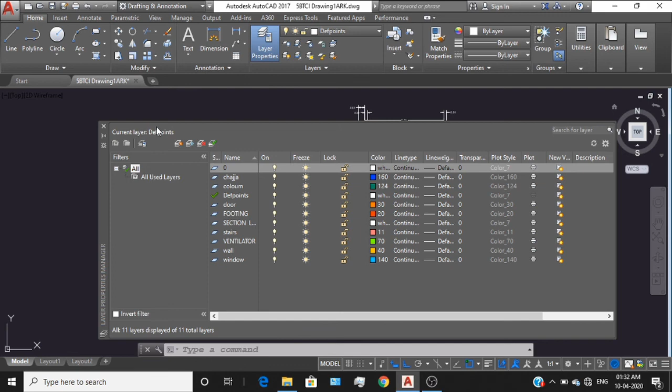So to place it under the layer property of wall, I have taught you already in the previous video. We need to go to the layer properties. We can create it through this point. This is new layer, Alt plus N. I have already created so many layers. So no need to create again, but you can try it and watch my video.

And then what I need to do is select the whole plan, go to the function and select the wall. Okay, so it comes under the wall layer. So if I switch off this wall layer, then the whole plan will go off. Okay, so this will help me in working with the wall.

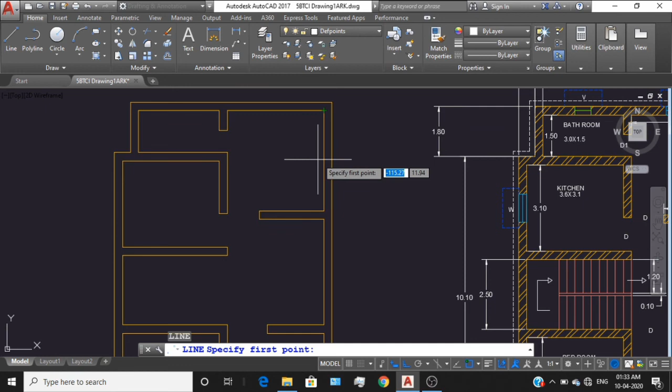Now it's time to make the windows. You can place the windows according to the designs of the plan. It depends on the columns, placing of the columns and designs according to different architectural designs. So it's a basic plan. So according to this plan, I'll place all the windows in the center of the walls of all the rooms. So my window dimension is approximately 1 by 1 meter. So it's a square window.

So starting with, it's my trick, like how I will make the window. And you can make your own tricks to draw anything faster. It may be your trick is faster than my trick, but just practice it. Okay, so I'll first make the line in the center. I'll show you again. Control Z, enter. I'll search for the center, the triangle. So here's the triangle midpoint. I'll draw one perpendicular straight line.

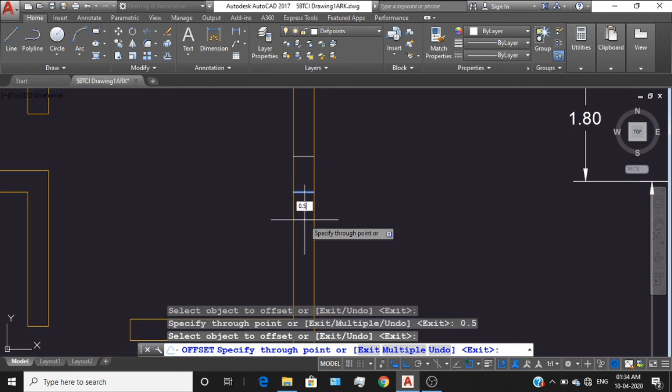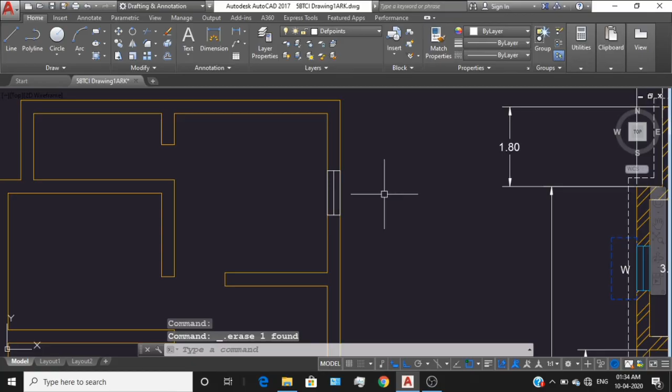Then I'll take offset, O, enter. I'll take offset 0.5 meter this side, from the center 0.5 meter this side. Then if you want one line also in the center, this represents the window. And then if you want a complete square window, then press REC, rectangle, from this point to this point and delete these two extra lines. So this is how we can make the window.

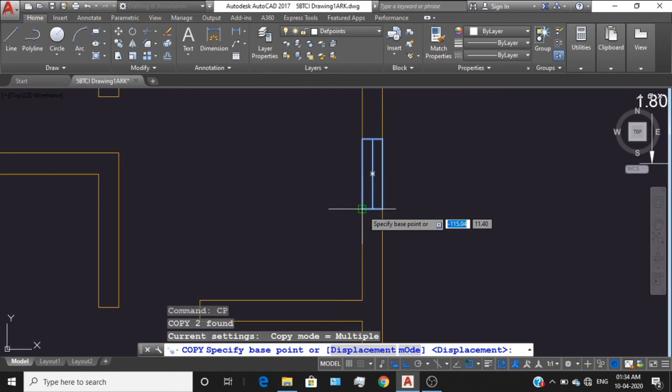Similarly, we can draw everywhere, but in a plain line, we can just copy paste it to save time. CP enter, or you can go for CO enter. So it's again one trick how to copy and paste. I will not select it from any point because I am going for the center of the plan. So I will select the center of this window. Then I'll check for the center of this room, this dining room. This is the midpoint. I'll click. Then I'll go for the center of this drawing room.

For this, you need to remember you don't need to join all the lines. If you join all the lines, you will not be able to find the center of each and every point. And also from the object snap settings, you have to ensure that midpoint is on. So similarly with the ortho off, you can copy paste it continuously. CP enter.

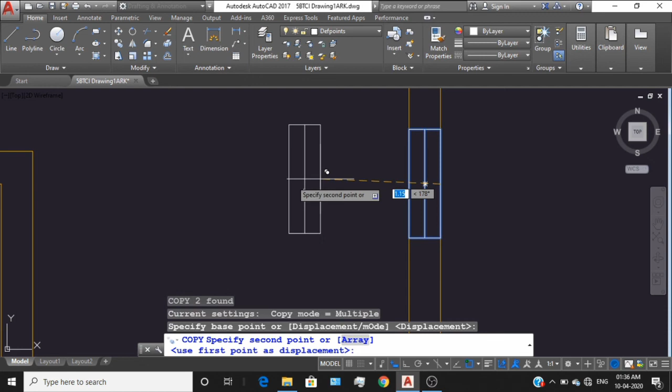Now I need to copy it for this side. So this side midpoint I'll find on the inner side. So what I need to do is copy from this end. Instead of left side, I'll select it from the right side. I'll paste it here. For staircase, we don't need a window. This is for kitchen. This is also your wish. You can make a bigger window for kitchen. There is no window in this side. We have two windows here and here in the other direction.

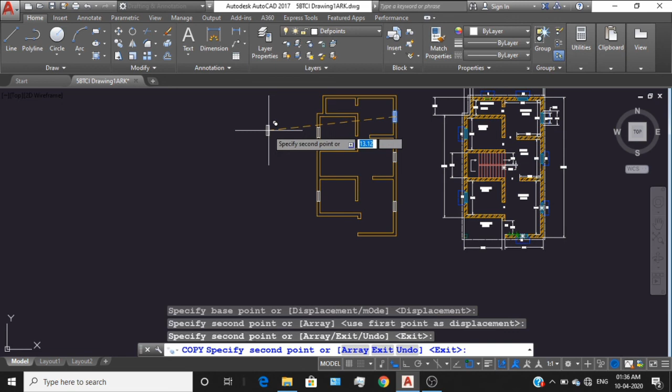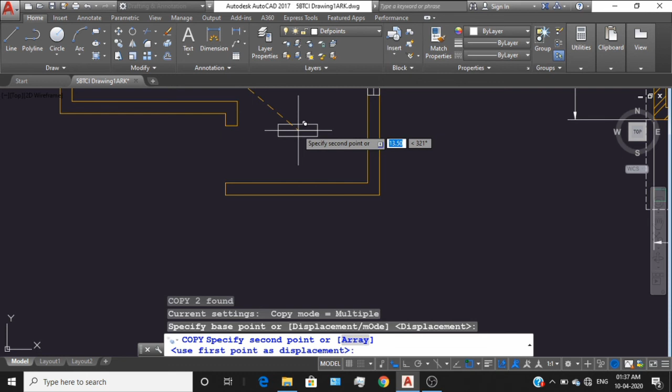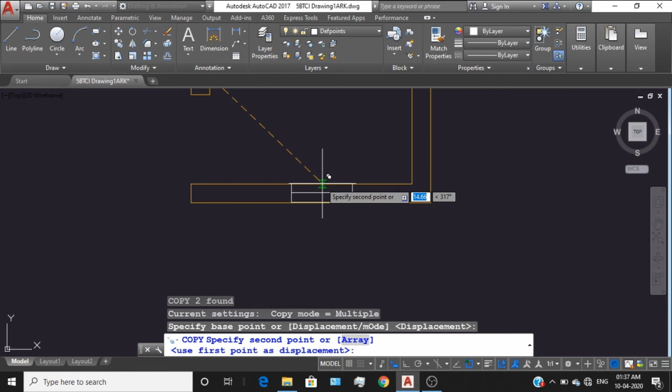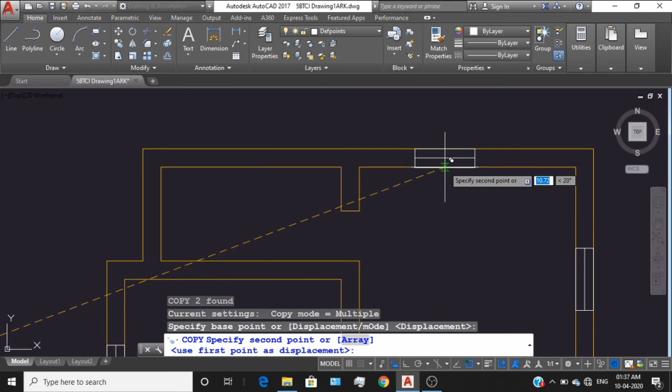So what you need to do is rotate this. RO enter. I have taught you already in one of my videos. It's 90 degrees. Again CP. Look, I have selected the wrong point this time because of hurry, so I'm not able to select the center. So what I need to do is escape and select again. Otherwise it will create an error. CP enter. Just precisely select this midpoint from the inner. Then again CP enter. Select this point and select this midpoint. This one.

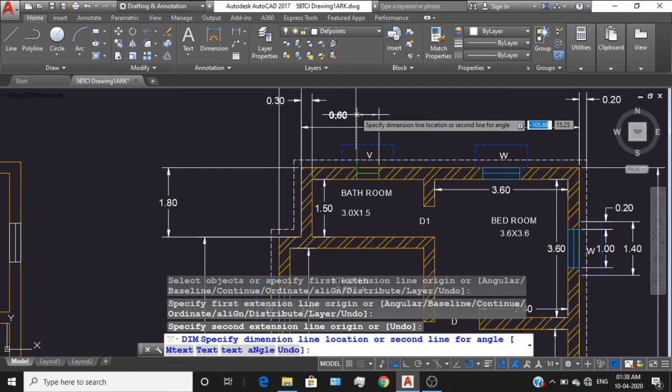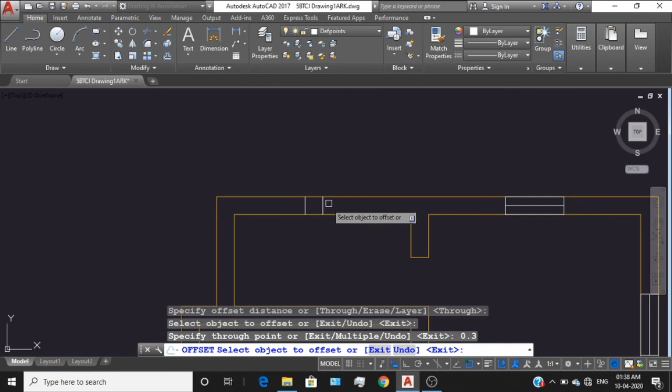Okay, so here we have one bathroom. For bathroom we have a ventilator. So for ventilator, what is the dimension here? DIM enter. From this point to this point is 0.6. Okay, so for ventilator it's 0.6. You can learn how to make a ventilator also. From the midpoint I have drawn one straight line. O enter, enter. This side 0.3, half of 0.6. This side 0.3, half of 0.6.

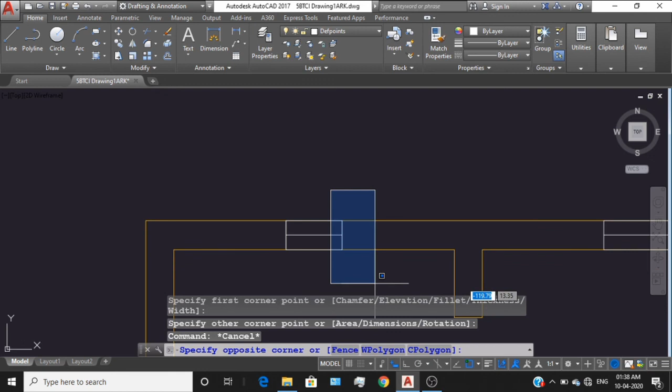Delete this line. L enter. Then you need to draw one REC rectangle from here to here to make it a single entity. Then delete it through this selection. Ventilator also done. Okay. Now delete this window also.

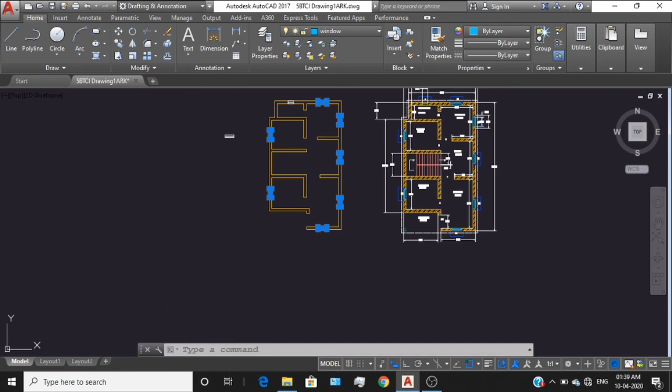Now the next step is select it through the blue color selection, because if you go for green color it will select the full wall, but we don't need to select the full wall. We'll go for blue selection because we need to select windows to put in the window layer. So I'll select this. Then I'll go to the layer options. It's window. Done. It's in the blue color now. Similarly for ventilator, I have a new layer, ventilator. This is also done. Press escape and delete unnecessary things. So this is how we can place the windows and ventilators.